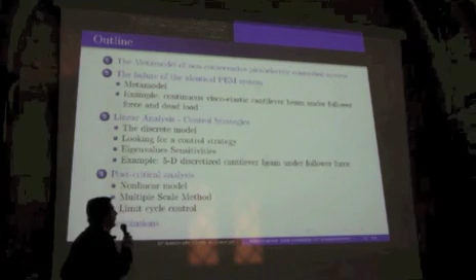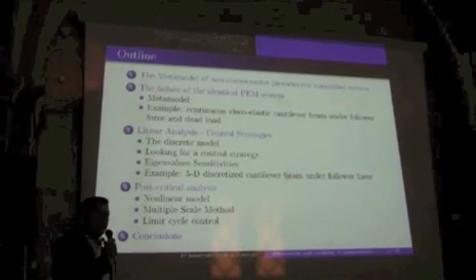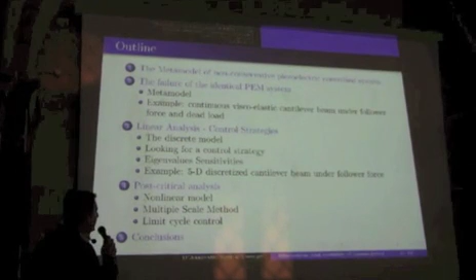This is the outline of my talk. First, I want to build a meta-model of a non-conservative piezoelectric controlled system. Then I will show you the failure of an identical, a particular choice of the meta-model, piezoelectromechanical system. Then I will build up a linear analysis and define control strategies. If I have time, I will also discuss a post-critical analysis.

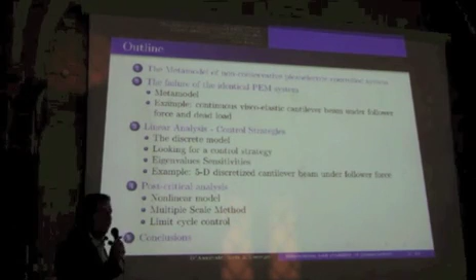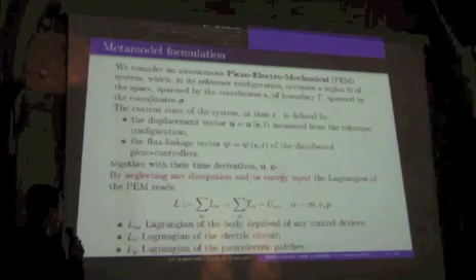So we consider an autonomous piezoelectromechanical system, PEM, which in its reference configuration occupies a region omega of the space, spanned by the coordinate S, of boundary gamma, spanned by the coordinates sigma. So the state of our system, in the reference configuration at the current state, is described by the displacement vector u and the flux linkage vector psi, together with their time derivatives.

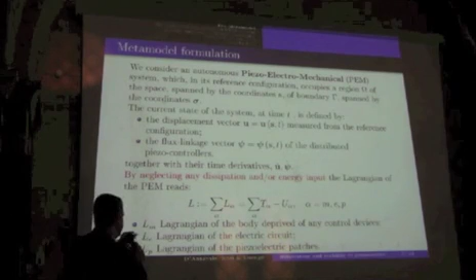First of all, we neglected any dissipation and/or energy input. We are able to write the Lagrangian of the system, which consists of three parts: a mechanical part, an electrical one, and a piezoelectric part.

Here you can see the contribution of this part on the kinetic energies and on the potential energies, and you will see that some matrices and the differential operator will appear in the formulation.

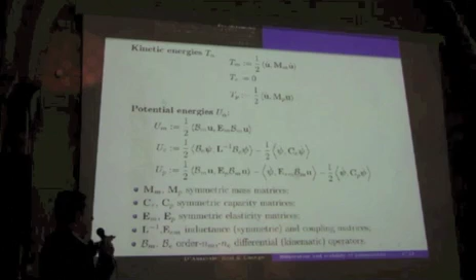Then, as is usual, we neglect the mass of piezoelectrics, and we also neglect their stiffness with respect to the stiffness of the structure, and we build the action functional, whose first variation, delta H, consists also of three parts: the mechanical one, the electrical one, and the electromechanical one. I will skip the details.

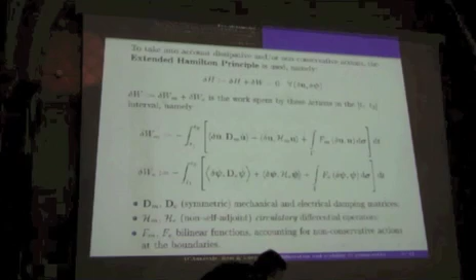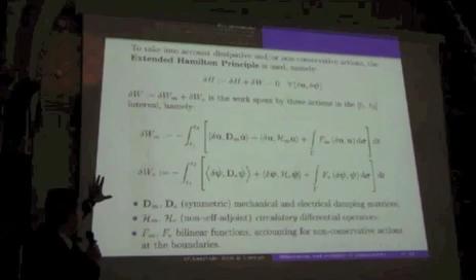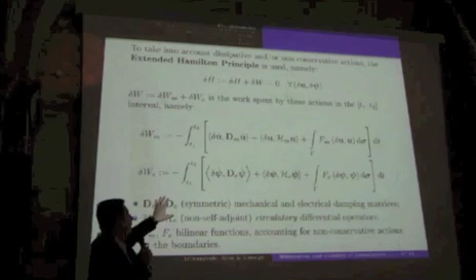Then we used the extended Hamilton principle in order to take into account non-conservative effects, both in the mechanical part and in the electrical one. You can see that delta W is the work spent by the non-conservative actions in the T1, T2 interval. We will talk about damping effects, D matrices, and circulatory effects, the so-called H operator.

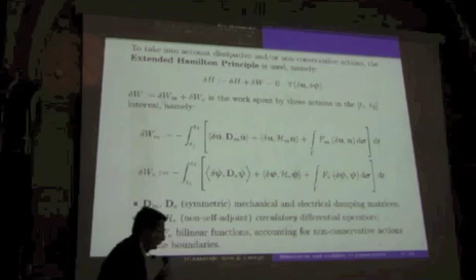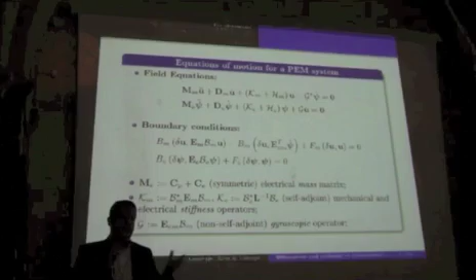From the stationarity of this functional—I forgot that the brackets indicate the scalar product in the complex field—from the stationarity of the first variation of the Hamiltonian, we can write the field equation of the PEM system and the boundary condition.

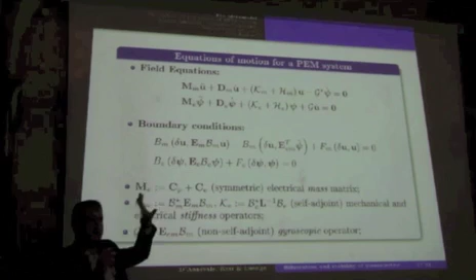And you can see that the coupling, both in the field equation and in the boundary condition, is made by an operator, a gyroscopic operator, and its adjoint, which is defined by the star.

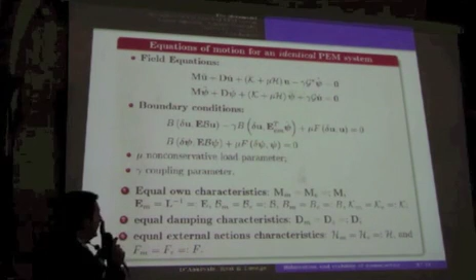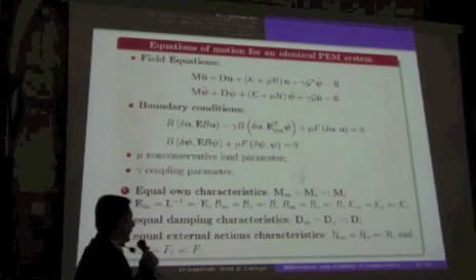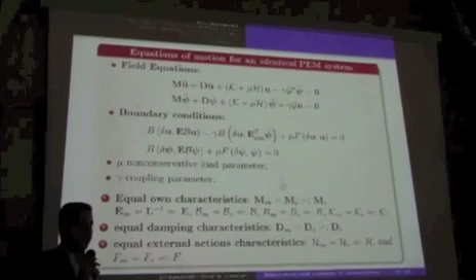Then we choose a particular meta-model, and we call it the identical PEM. You can see that it is defined by equal own characteristics, so we choose an electrical mass identical to the mechanical one, the same for the stiffnesses, and the same for both differential and boundary terms. Moreover, we choose also equal damping characteristics and equal external action characteristics.

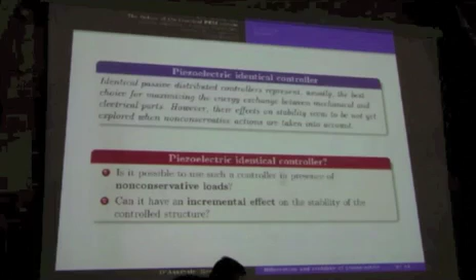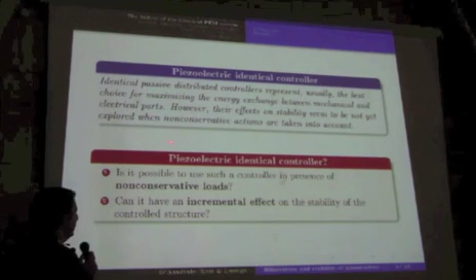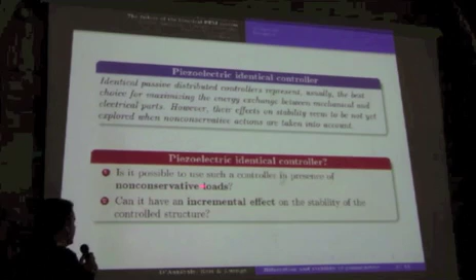So at this point, we ask ourselves: we can say that identical passive distributed controllers usually represent the best choice for maximizing the energy exchange between mechanical and electrical parts. However, their effects on stability seem not to have been explored when non-conservative actions are taken into account. So we ask ourselves: piezoelectric identical controller—is it possible to use such a controller in presence of non-conservative loads? Can it have a detrimental effect on the stability of the controlled structure?

Here I will skip a lot of details, but in order to perform a perturbation analysis of the PEM system, of the metamodel, we first consider it as a purely mechanical system. So these are the equations of motion and the boundary condition. There is a trivial equilibrium.

We need, for the perturbation analysis, the right eigenvalue problem, and the eigenvalue lambda naught, which is a function of a load parameter mu, decides on stability, so that if mu is equal to 0, the real part of lambda naught is less than 0, but when mu reaches critical values mu naught greater than 0, a bifurcation condition can occur.

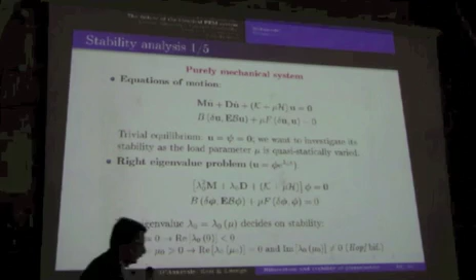So we also need the left eigenvalue problem, the left eigenvectors, in order to write the compatibility or orthogonality condition.

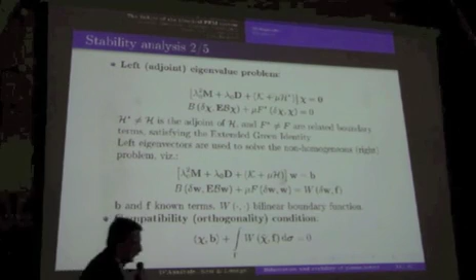Then we consider the PEM system, the coupled PEM system, with a coupling parameter gamma. These are the eigenvalue problem, and these are the boundary conditions. Mu is fixed at the uncontrolled critical value, mu naught.

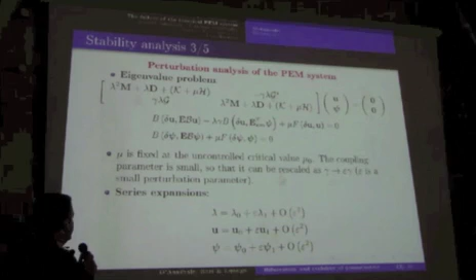Gamma is taken small, with the meaning of an epsilon variable, a small perturbation parameter, and then we perform a standard series expansion of the eigenvalue and eigenvector. We write the perturbation equation, and at the leading order, lambda naught is a semi-simple eigenvalue for the PEM system. At the epsilon order solution, we have an eigenvalue problem in the correction lambda 1, the correction to eigenvalue lambda naught.

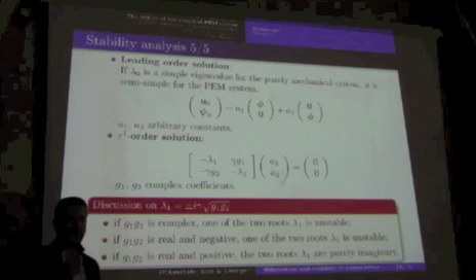We can discuss this eigenvalue problem, and we can see that only in one case, when the product of G1, G2, which are complex coefficients, is real and positive, are the two roots of lambda 1 purely imaginary. This entails that only in this case does the identical controller not affect the stability of the PEM system—but in the other case it is always detrimental.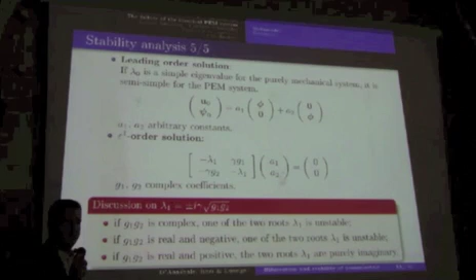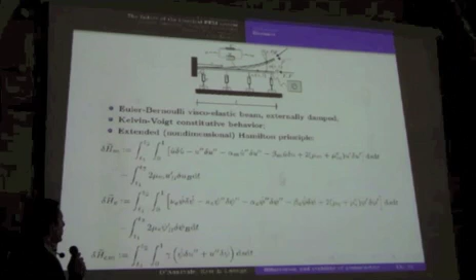Okay, let me show this result by an example. We consider a planar Euler-Bernoulli viscoelastic beam, externally damped, loaded by follower force and dead load.

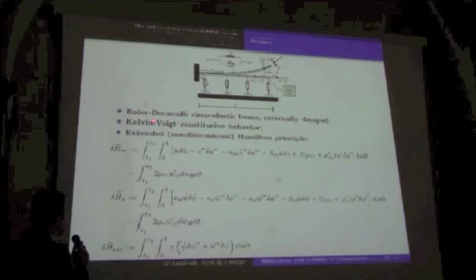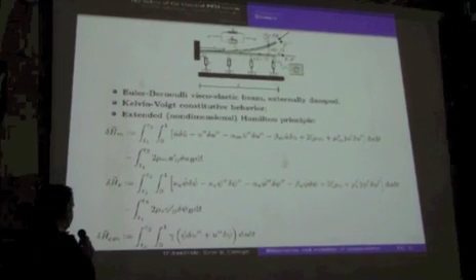We have a Kelvin-Voigt constitutive behavior, and we have a layer of distributed piezoelectric on the beam, and a circuit, a controller. Then these are the three first variations: mechanical, electrical, and electromechanical.

When you set some electrical parameters in this way, you can obtain the identical PEM beam. These are some parameters: alpha is internal damping, beta is external damping, mu is the load, mu c is the conservative part, the dead load. Gamma is the coupling parameter.

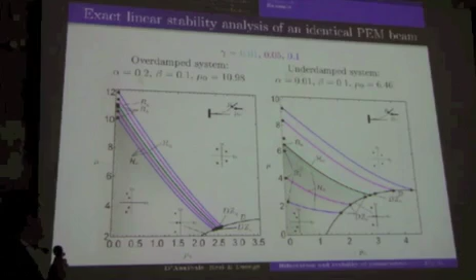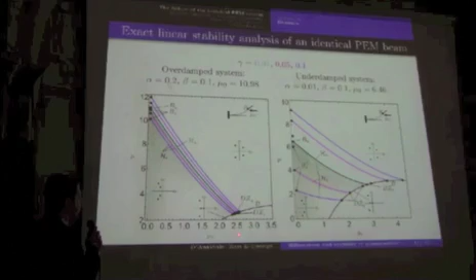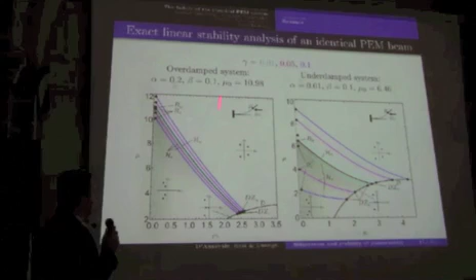So this result is the exact linear stability analysis of the beam. You can see that the Hopf curves in the plane non-conservative versus conservative loads shift. The stable zone, which is the gray part of this diagram, reduces itself, and this happens both for the overdamped system and for an underdamped system, for each value of the coupling parameter.

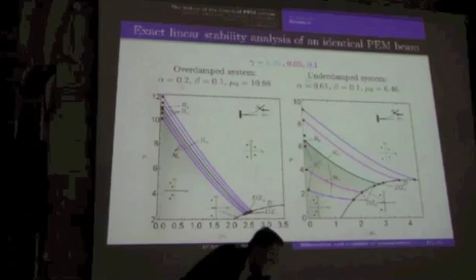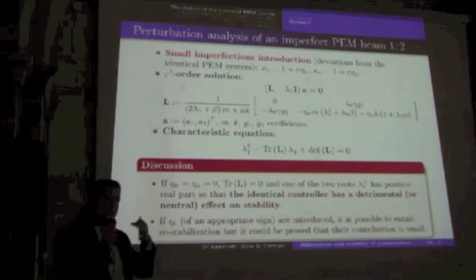If you choose the electrical parameter not perfectly identical to the mechanical one, introducing a small imperfection in the electrical parameters, you obtain again an eigenvalue problem by a perturbation method in lambda one. You can see that this imperfection appears on the diagonal of this operator, and if you take them equal to 0, you have a detrimental effect on stability.

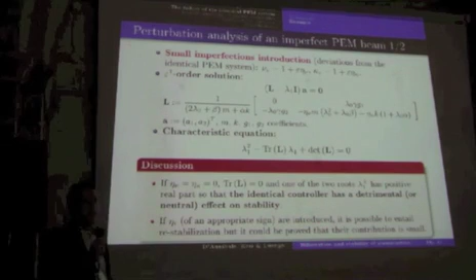But if you take them of an appropriate sign, you can entail restabilization of the system, though it can be proved that their contribution is in general small. I will show it by an example: introducing the imperfections, in both overdamped and underdamped systems, you can see that this area of stability is very small.

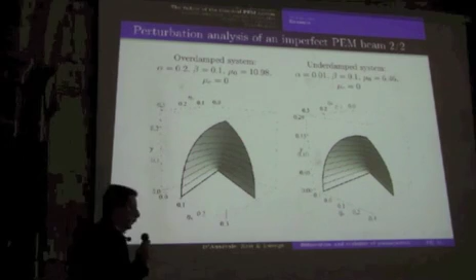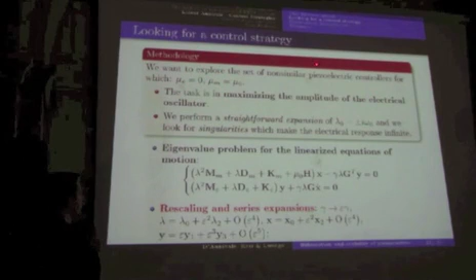In looking for a control strategy, we want to explore the set of non-similar, non-identical piezoelectric controllers for which the non-conservative electric load is taken equal to 0, and the mechanical non-conservative load is taken equal to the critical load value.

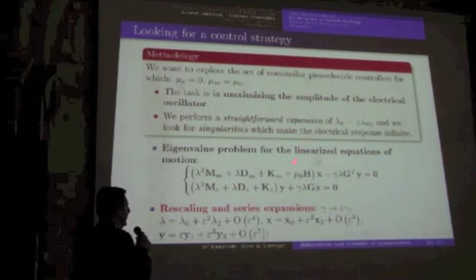The task is maximizing the amplitude of the electrical oscillator, and in order to do this, we perform a straightforward expansion of the eigenvalue lambda naught, and we look for the singularities which make the electrical response infinite. I will skip the details.

I just underline the structure of the perturbation equation. At the leading order, the mechanical oscillator is undisturbed. At the epsilon order, the mechanical oscillator forces the electrical one. At the epsilon power 2 order, the electrical response influences the mechanical one.

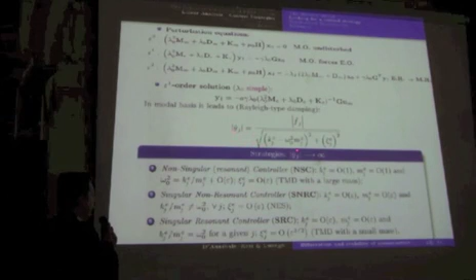So this is the electrical amplitude, and you can see that by this equation, you can have three possible control strategies in order to make y_j tend to infinity.

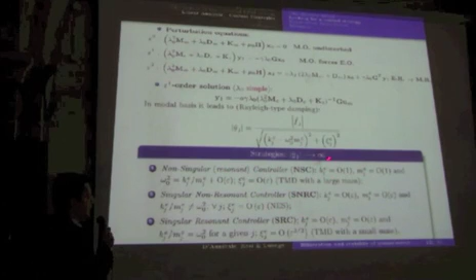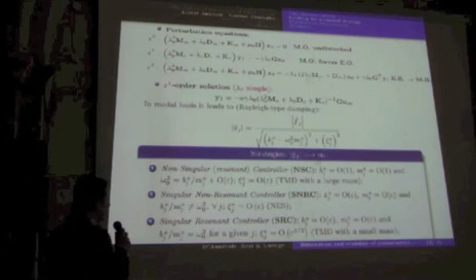The first one is a non-singular but resonant controller in which the electrical stiffness is of order 1, the electrical mass is of order 1, and their ratio is tuned to the frequency of the mechanical oscillator, while the electrical damping is small. This resembles the TMD with a large mass, the tuned mass damper with a large mass.

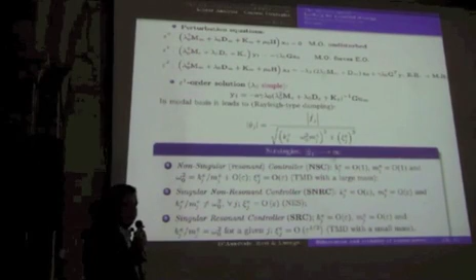But you can have a singular non-resonant controller for which the electrical mass and the electrical stiffness are of order epsilon, the ratio is not tuned, and the damping is also small. This is a kind of NES, nonlinear energy sink, but here we have a controller which is linear.

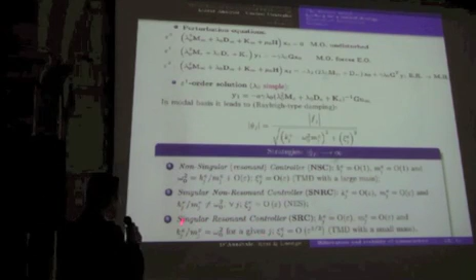Then you can build up a singular resonant controller for which electrical stiffness is of order epsilon, electrical mass is of order epsilon, and their ratio is tuned. This is a TMD with a small mass.

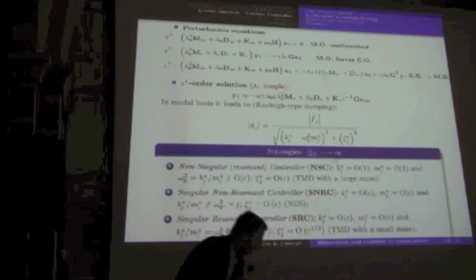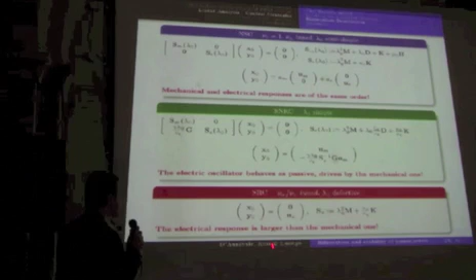So we perform a perturbation analysis for these three controllers. I will skip the details. At the leading order solution, for the non-singular controller, the mechanical and electrical responses are of the same order. For the second controller, the electric oscillator behaves as passive, driven by the mechanical one. For the third controller, which is defective, the electrical response is larger than the mechanical one.

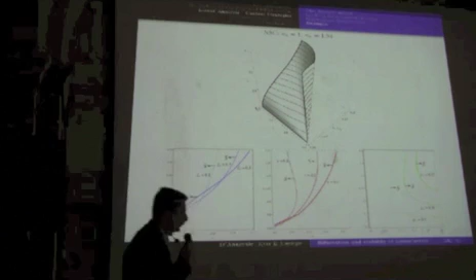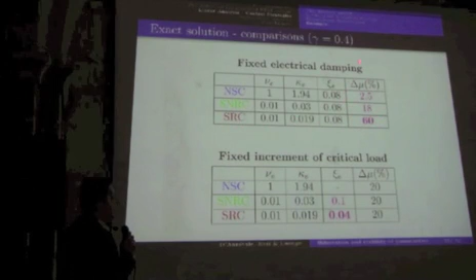So this is the stable part for the first controller, this is the stability domain for the second controller, and this is the stability domain for the third controller. If you make a comparison, you can see that the singular resonant controller is the best, because it can increase the critical load by about 60%.

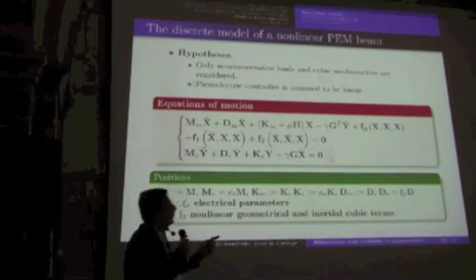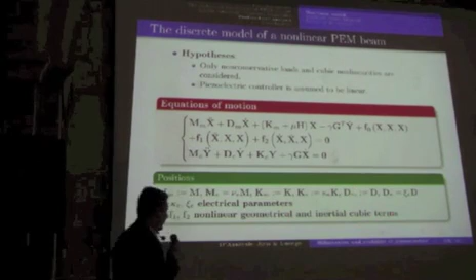Just one minute to conclude: when you take the nonlinear model of the beam, when nonlinearities are of geometrical and inertial type, you can perform via the multiple scale method an analysis of the nonlinear post-critical behavior. These are the results in terms of complex mechanical and electrical amplitudes of the multiple scale method, which contain the sensitivity of eigenvalues, obviously.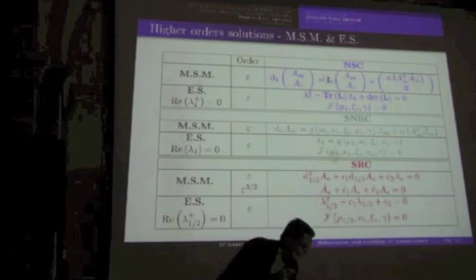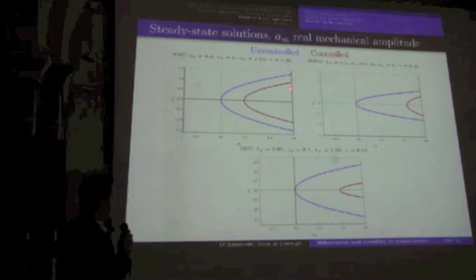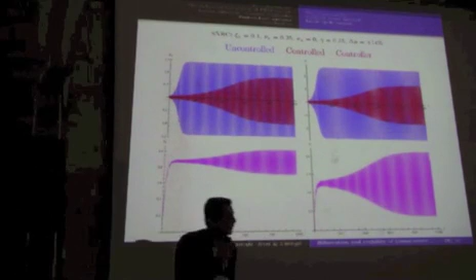We study the steady-state solution in terms of a real mechanical amplitude, and you can see that for the three controllers, the limit cycle is less than the uncontrolled one. These results are confirmed via direct numerical integration in the three cases for a two degree of freedom system.

Okay, these are the conclusions, but I have no more time, so thank you for your attention.

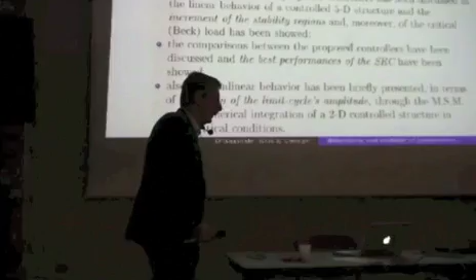Yes, we are trying to work with a discrete model. In particular, we are thinking to perform an analysis on a double pendulum. The actual problem we have is to model, to experimentally realize the follower force.